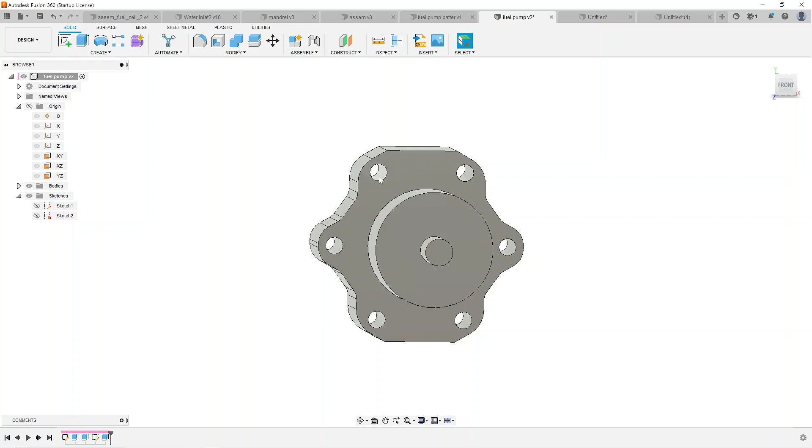Let me show you what we're starting with. This is our fuel pump modeled, just a pretty rough shape. All the holes are correct, this diameter is correct, and the outside's just kind of close. This is representative of an oil pump, and these are the mounting flanges. So these are the two parts - this is the oil pump, that's what we bolt to, and this is the fuel pump that we need to install. We got to build a bracket that picks up on these two things.

So I'm about to do that, and let's do it in real time. I want to show you guys how I do it. Let me pull up a picture real quick.

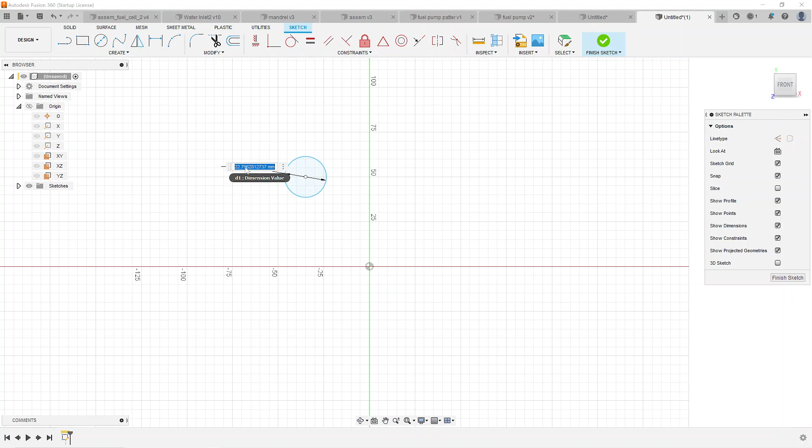Let's start modeling this. So here's our origin. We just go ahead and pop a hole here. The bolts are 1/4 inch, so the OD of the bolt is 1/4 inch. So we're going to put the hole at 0.3125, that's a 1/16 of an inch bigger. That'll give us a 1/32 of an inch clearance.

I'll just change this document setting. Bump this into inches, freedom units, because it messed this up. There we go, freedom. All right, so we know we got 6 holes and they're evenly spaced, right?

Oh, now we're clicking stuff wrong. All right, so we're gonna do a dimension to here. I checked this earlier, this dimension I wrote it down somewhere - 1.5625 inches. And we need to do a bolt circle.

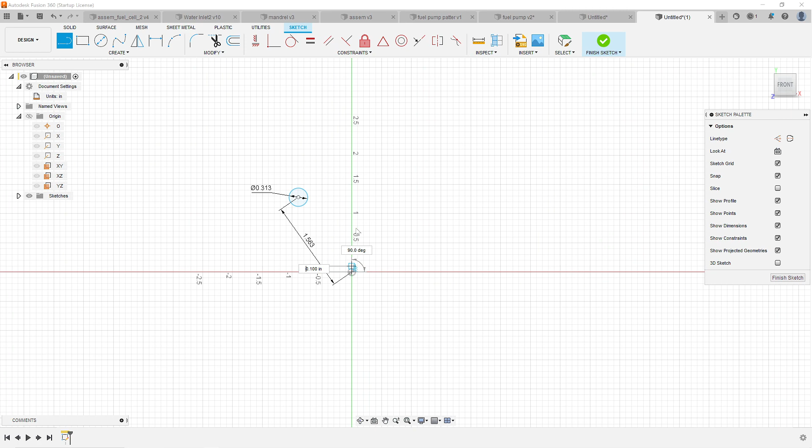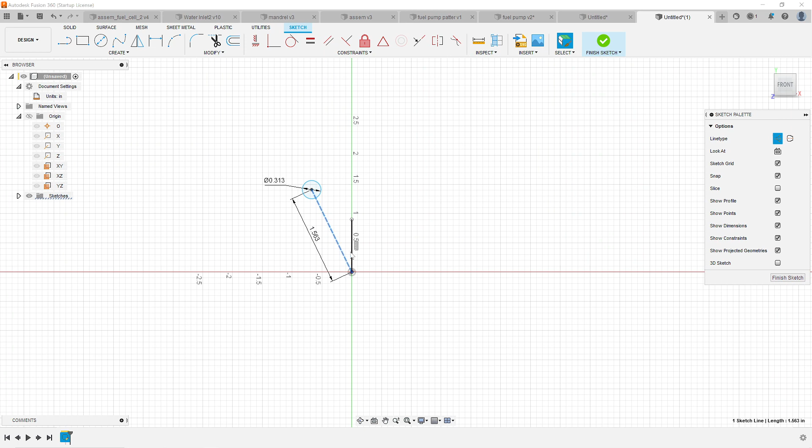So we want the top 2 holes to be centered, which means since there's 6 holes, we're going to have 60 degrees between the holes, so 30 degrees here. So what I'm doing is drawing these couple of lines - we're going to call those construction lines, maybe. There we go. Then we can just take a dimension, click on this, click on that one, throw an angle of 30 degrees. So that one hole is correct.

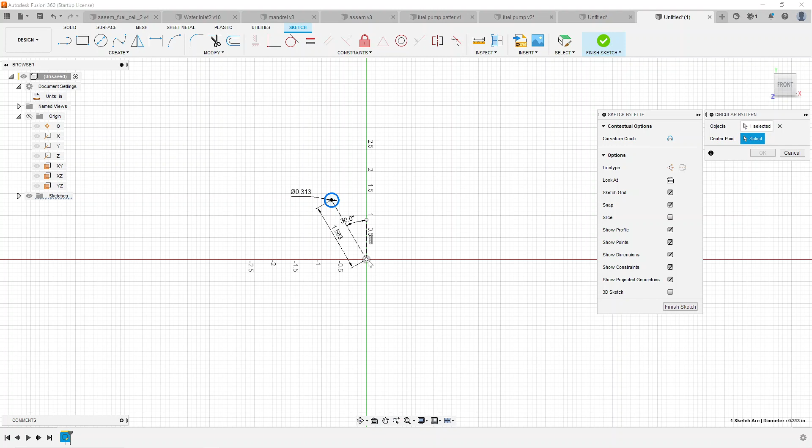Now I can go to this thing called create circular pattern, pick up our circle. Uh-oh, where'd it go? Create circular pattern, there we go. Click our center point, type in we want 6 holes. Boom, now we got those 6 done.

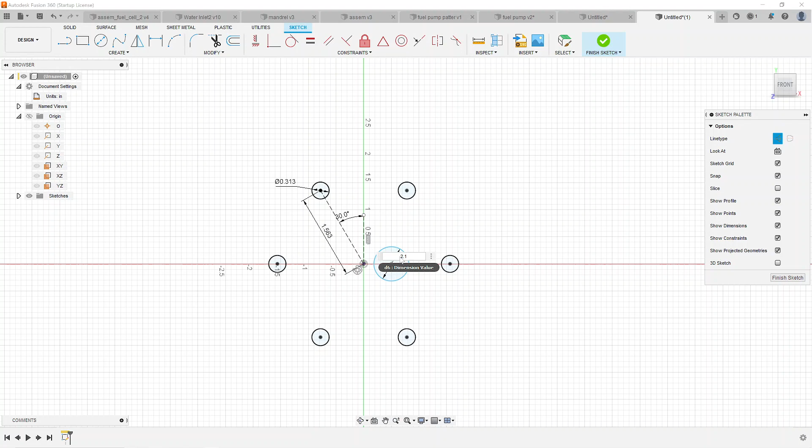So we also need that big hole in the center. We don't want that to be construction though, let's change that. This guy we just checked a second ago was 2.12 inches, but we're going to make this 2.13 inches. That means this hole is slightly bigger, so it'll slip over the pump and have 10 thousandths of clearance. You got to leave a little bit of clearance just for machining. The company that's building this can do plus or minus 5 thou, so we're giving ourselves 10 thou. So even if they come in at 5 thou tighter at 2.125, it'll still go together.

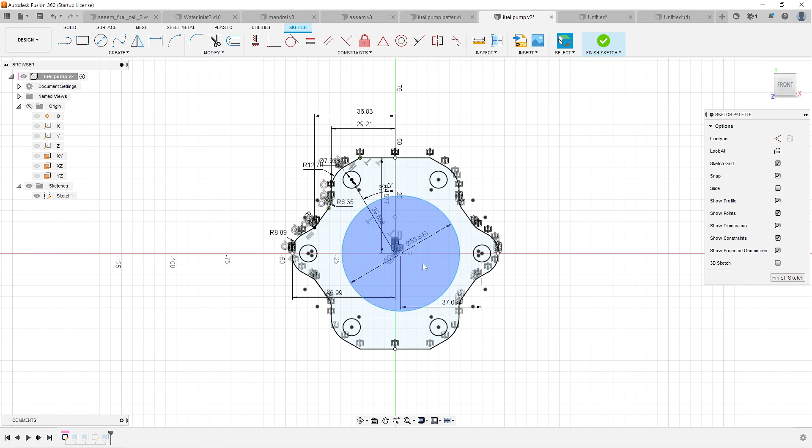So that's great. Now this dimension from here to here, I might have that somewhere, I don't remember. Let's go check. Let's see, fuel pump. This is our pump model. Here it is, 1.46 inches. Okay, jump over here, 1.46, there we go.

So one of the things we talked about before was that we picked up this hole, and where they intersect is actually the first hole of the oil pump. So let's throw a circle. I hit the C button for circle and put my mouse over this, and you can see it puts that line. Then I come down here and do the same thing, and watch what happens when I get close to that first one - see how they pop together? Super convenient. That's not convenient, it's still putting them as a construction. But anyway, that gets our location correct.

Throw a dimension on this - that hole is 0.43 inches. There we go. So that's actually our first hole that we got to do. That's going to go through the oil pump, the big bolt - that's actually the alternator pivot bolt.

We're going to throw another one over here. Man, I keep doing these construction ones, need to change that. Anyway, this hole is 0.35 and it's not construction. Let's fix that. Do another circle.

I don't know why this keeps showing up as construction, but there, that's normal.

So here, these were the two dimensions that we took to get our angle. This number was 1.859 inches, and then we had this dimension from here to here was 2.763. I just measured these with a caliper, got it as close as I could.

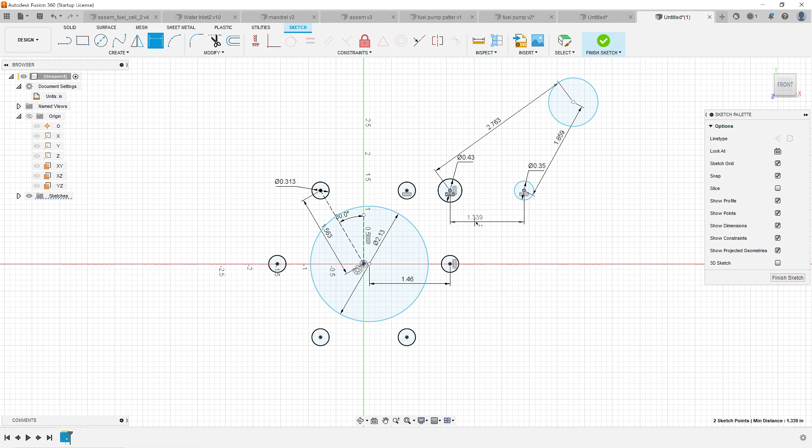So I'm going to click these two. Those two are now horizontal, but we need a distance between them. So let's click the two things, and that distance is going to be 1.888. Now that turns black, it's fully defined.

This one up here, the reason it's doing that color is it could be flipped down here. So I'm just going to cheat and click fix because I know it's where it goes. And it's still blue because I haven't given it a diameter. So let's do that. That is 0.35. Now it should be fully defined.

So what are we at? 5 minutes in, 6 minutes into the video, we've already got all the holes located, I think.

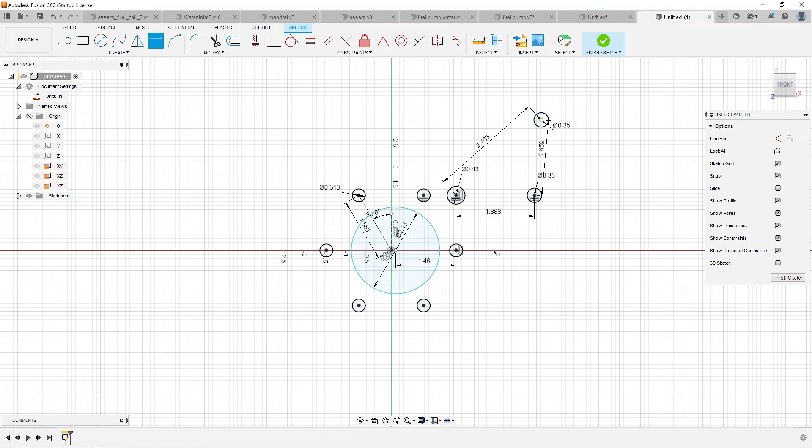Looks like this one's still blue. Why is that? That diameter. No, we did the diameter. What did we not do? Maybe this and this need to be, let's try that, see if that, there we go. Told it those two things are horizontal. So now everything's black, we're fully defined.

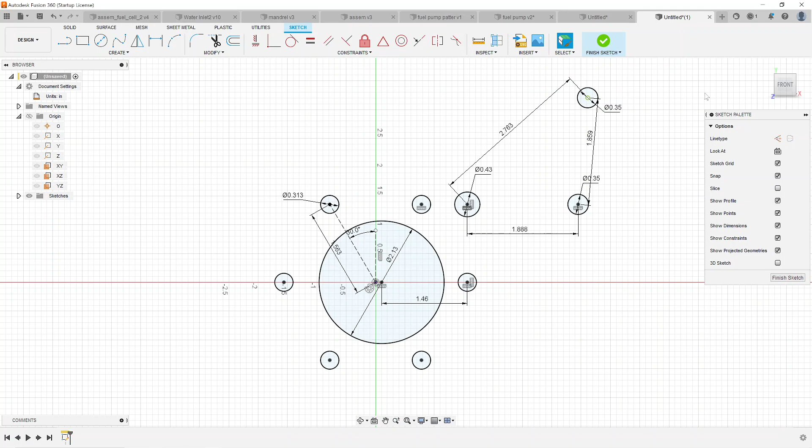We need a plate shape. So here's what we're gonna do. We're gonna pop a circle from the center line of the bolts. I checked a minute ago, the pump body, the biggest diameter is 3.7, so let's just draw a circle like that. Come over here, draw some circles. This will make sense in just a second.

So we're just going to make these 1 inch for now. We'll change it in a minute if we don't like it.

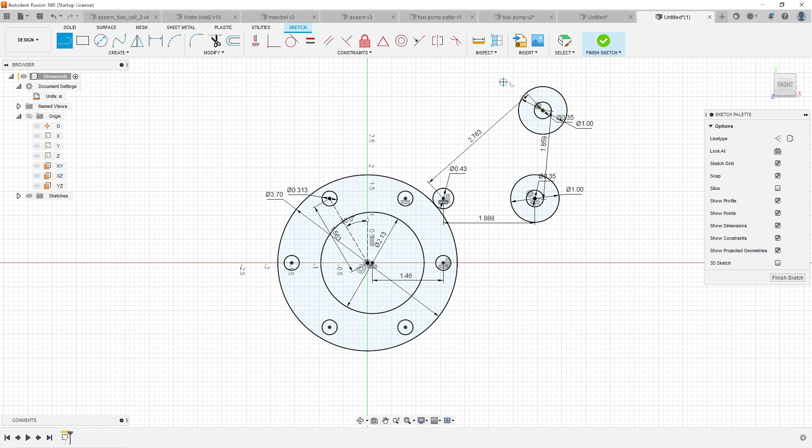So now what we're going to do is we're just going to draw a line from here to here. And we're just kind of connecting the dots and we're going to make these tangent lines in a second. So I drew those lines. I come up here to my tangent thing. And now I can click the line and click the circle and see how it pops that in nice and pretty. We're going to do that here.

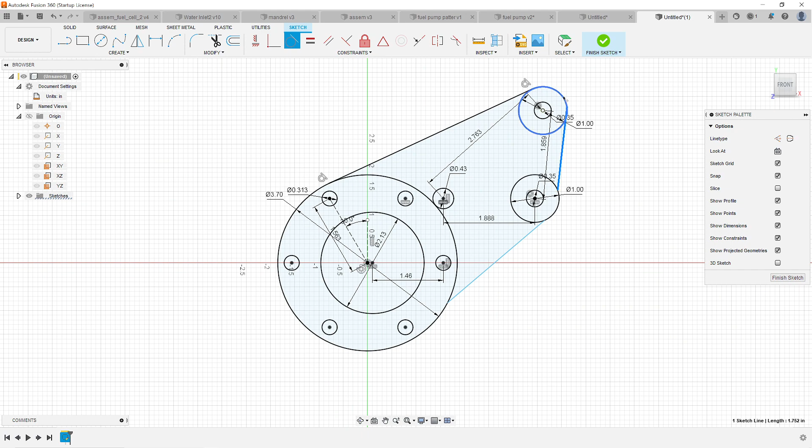And we just go around doing that on all of these. It almost feels like cheating, but as you can see, this works really well. And as you can look, if you back out and look at this, it's already starting to look like a bracket, huh?

So I think that's it. Man, that was quick. About 7.5 minutes.

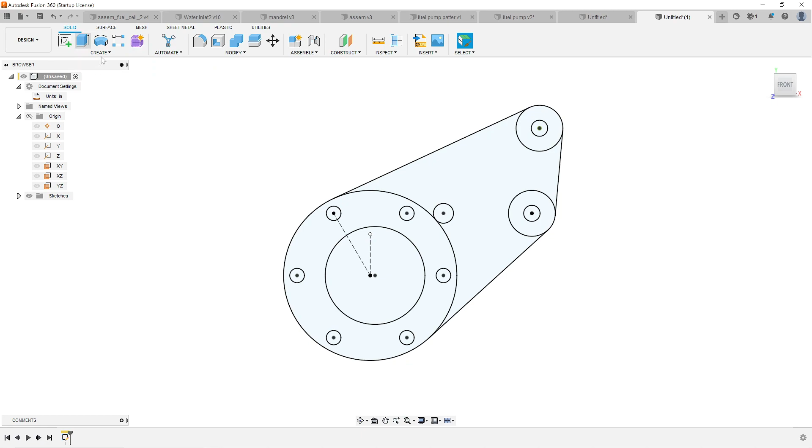So let's extrude that and see how that looks. I need this, that.

The rest is holes. Let's make this plate. We're gonna go with 1 inch thick starting off. There we go. There's our bracket.

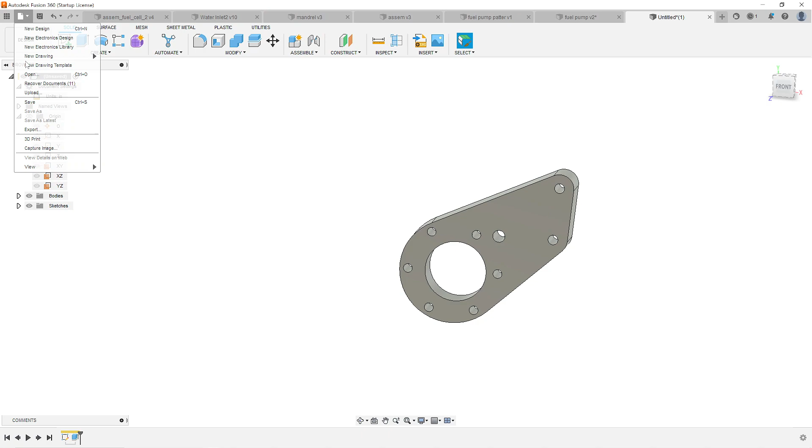Now, let's grab, I'm going to start an assembly real quick and let's throw these parts into an assembly and see how that looks. All right, file new, design.

We have to save assemblies before you can add parts, so we'll call this fuel pump assembly. Probably could have been better, but let's see.

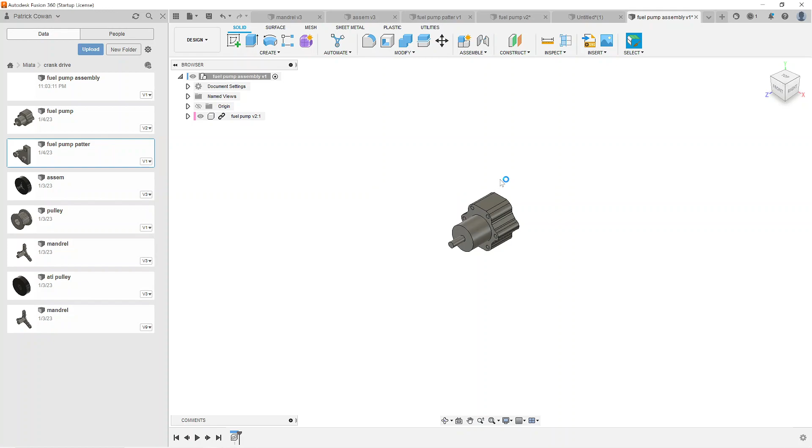We're going to need a fuel pump. Here's our poorly named part. That's the fuel pump.

Let me go find wherever... oh, we haven't saved this. Hold on, let's give that a name. Can't throw it in there if it's not there, so let's call it bracket.

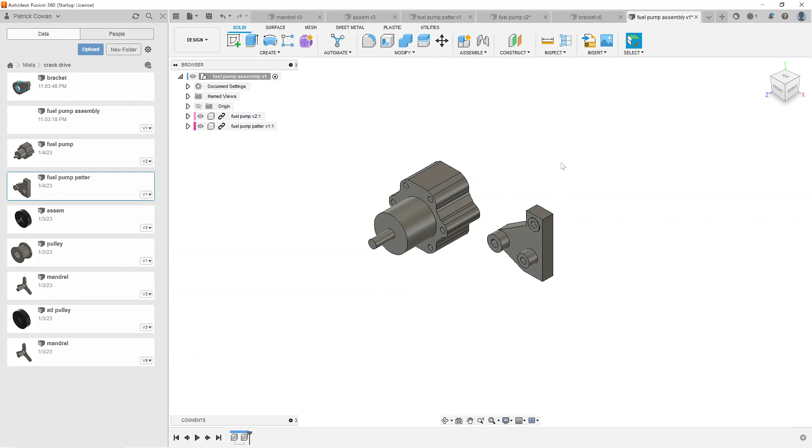Now we go to our assembly. Grab bracket, throw it in here. Oh, we still got to do the standoff, so we haven't done that yet. So we're going to have to do that. But this should work, let's see if this works out.

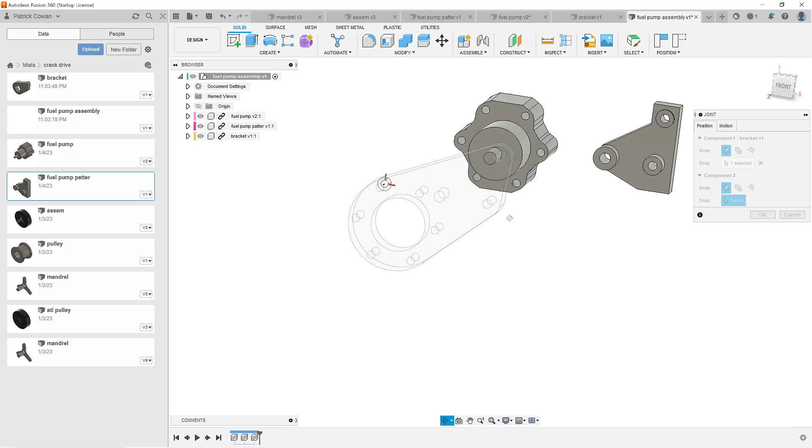So we go to assemble. We are going to do, let's just say that hole lined up with... which way does this actually go? That kind of matters. That goes there. I think it goes to this one. Let's try it.

That actually looks correct, just going to click it for now. Yeah, the holes line up. Oh, that's actually correct, I think.

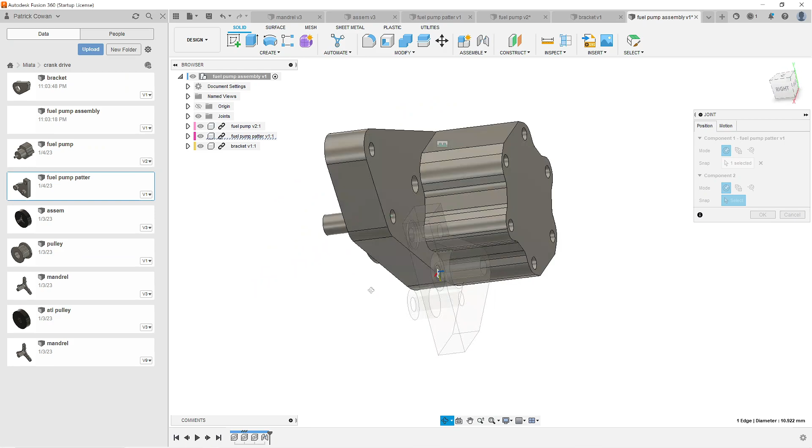Now this hole here, this circle, lines up with this one. However, they don't touch — here they're touching. We need to move this. We got to make some standoffs, which we haven't done yet, so we'll have to do that.

Yeah, it goes like that. So that space, see how it says minus 50 millimeters? That number is actually 2.2 inches. So let's put that in there.

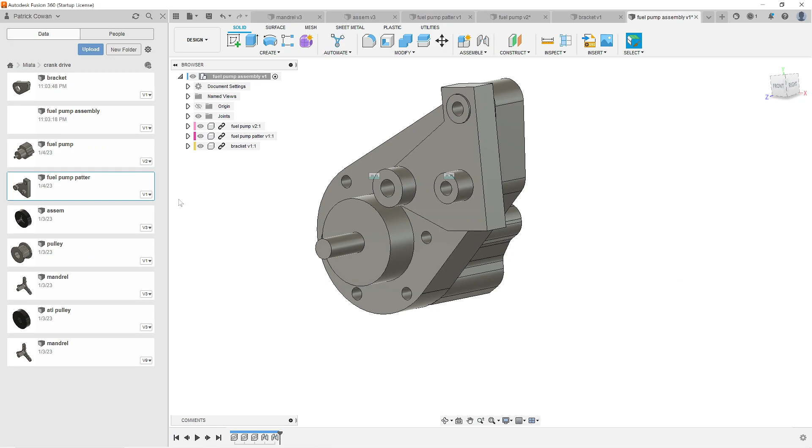Oh, looks like we went backwards. Edit that, flip it — nope, that didn't work. What are we doing wrong? Is it negative? Oh, it is negative. Negative 2.2 inches, there we go.

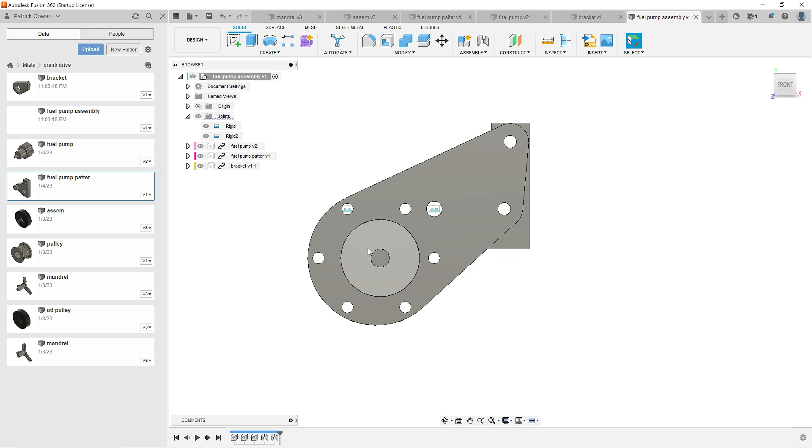Now let's do a front view. So you can see the holes are lining up in the pump and the bracket, and then the holes over here are lining up. And if I rotate this, see what I mean? There's our pump. Ooh, look at that. That's the first time I've noticed this — these two are close together.

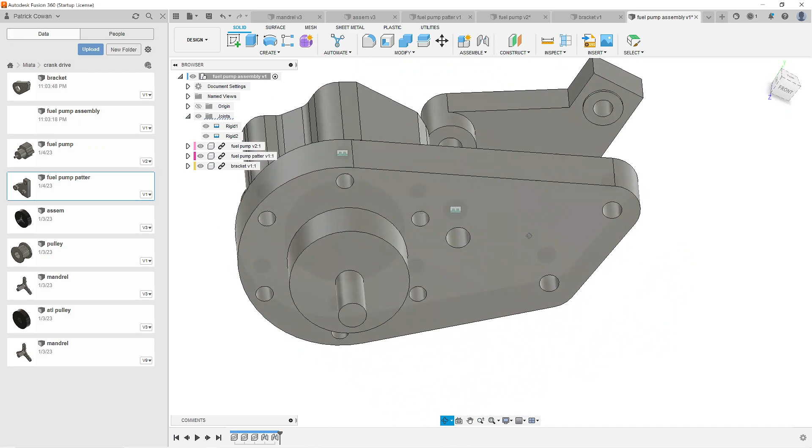Actually, that's going to interfere if I make a tube that big, so this could just be the pump modeled wrong. I'm going to check that in a minute. But you can see we're getting pretty close, and we hadn't been working on this very long — 10, coming up on 11-minute video.

So we've already got a bracket modeled. We got our pump and this piece already modeled. But anyway, you can see this goes pretty quick. So all we got to do now is make 3 standoffs, like metal tubes that connect the dots here. And it looks like we need to check this dimension on the pump.

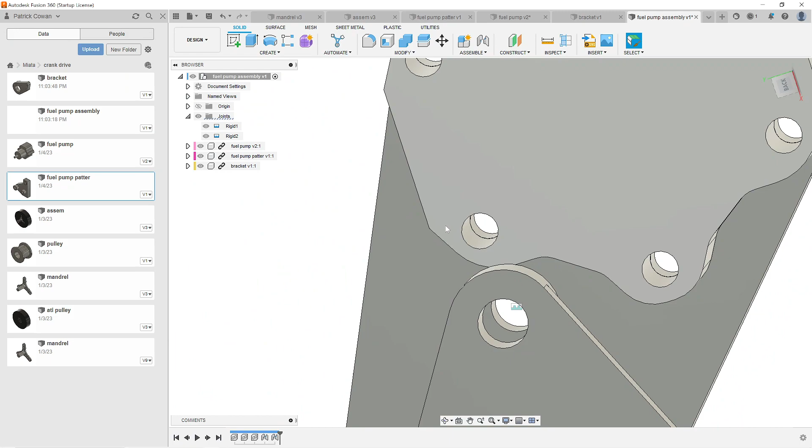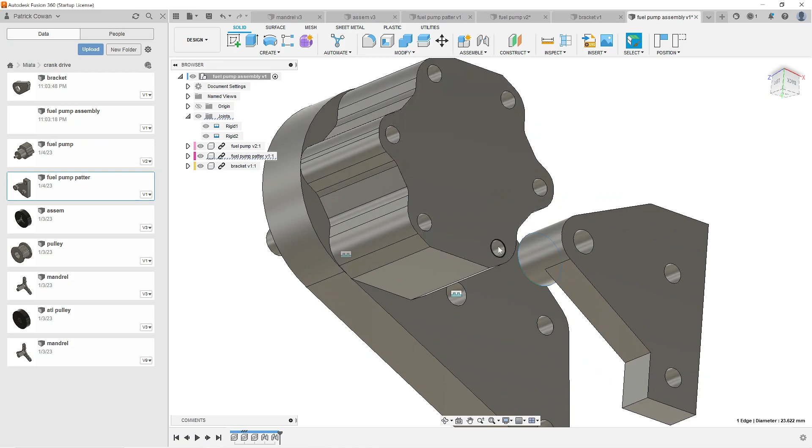I might have just kind of guessed at this, so I'm gonna check the real pump and update that a little bit, because I didn't think this was gonna hit — so it's probably just my pump model's bad. But anyway, whatever the problem is, I can always back off on this diameter for the tube if I need to. I'll get the pump updated, hopefully that fixes that. We'll make our tubes and then we'll have a bracket.

And that was easy. Now granted, I just made this thing an inch thick — it doesn't need to be that thick. Well, maybe it does, I don't think it does. But if we do make it this beefy, we're definitely putting lightweighting holes or something, because that's way too heavy. But anyway, as you can see, this is coming together pretty quickly.

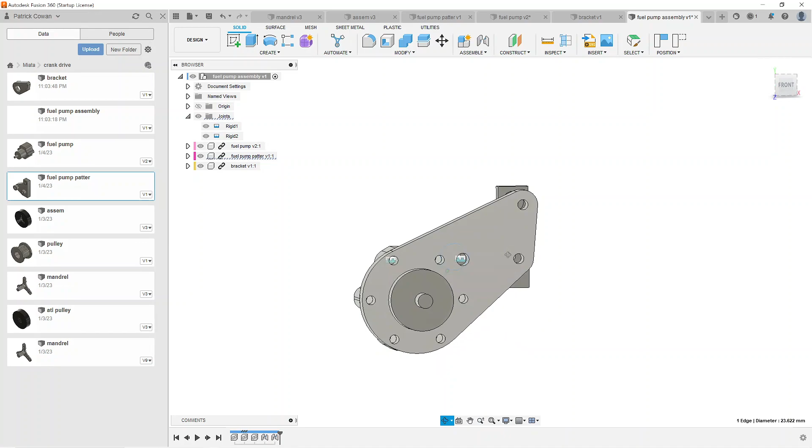Oftentimes I just show you guys the results of stuff for modeling, because I think modeling is kind of boring. But some people like to see how ideas — how would you do a project if you're trying to build something yourself? How would you do it?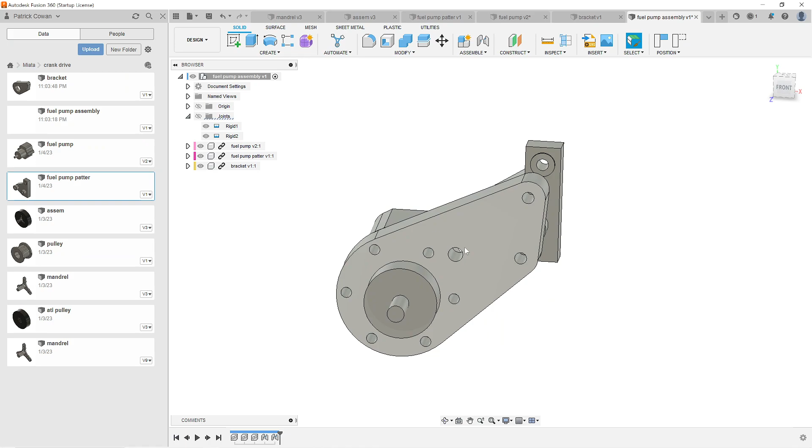As you can see, modeling this went quick, but that's because I spent an hour or an hour and a half or so mocking it up in the shop and then taking these measurements for like the bolt circles and this fuel pump. Like this bracket here actually took a while to do to get the — not that one, not that one, sorry, I don't know where it went. But anyway, this one, yeah.

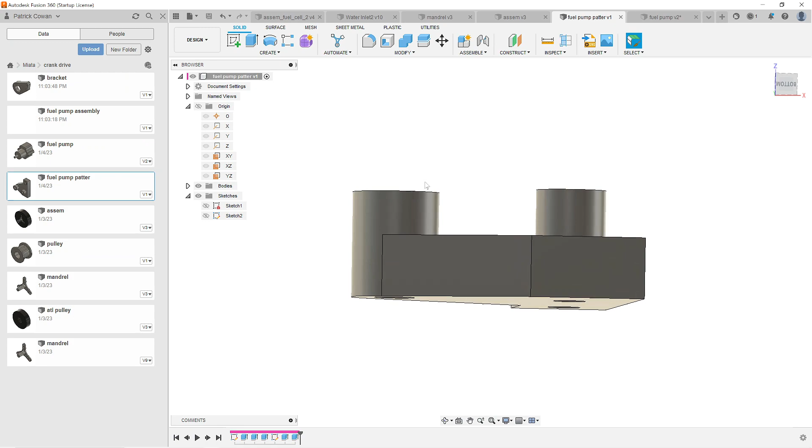Getting this modeled because these heights, like this boss here, is just slightly lower — it's probably hard to see, but this is slightly lower than that one. And I had to measure that, and I did it several times until I was confident that I'd measured this correctly. So both the position and the height of all of these was important.

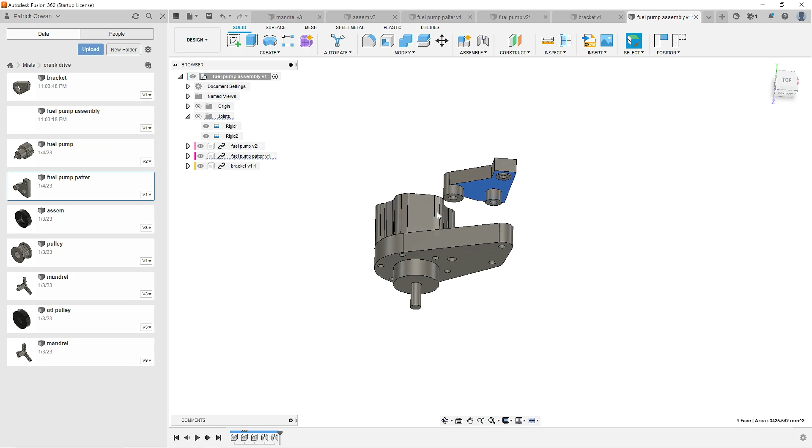So anyway, that's kind of detailed stuff. It took a while to measure, but as we can see, it's kind of working out for us. So anyway, hope y'all like that, and till next time, y'all take it easy.